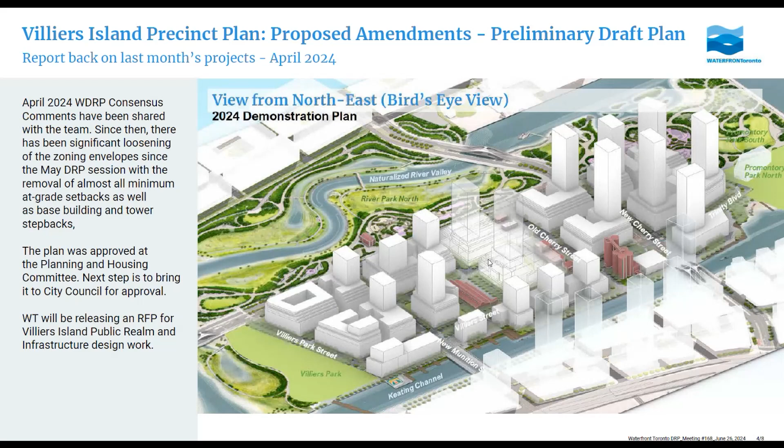Quick update since the April meeting. We have been very busy lake filling the Parliament slip just east of our new offices, to allow for Queens Quay to extend east and the Waterfront East LRT to extend east to meet with Cherry. This will also allow for the realignment of Parliament Street. These are critical infrastructure projects, not only for the Waterfront East LRT and the extension of Queens Quay, but also for the redevelopment of the Quayside precinct, as removing the existing alignment of Queens Quay and Parliament is necessary to normalize the blocks for that development.

We're now 100% complete with lake filling, and we're moving into the next phase of work to settle that lake fill. We're expecting this work to be completed by fall of this year, and then we'll start on the public realm and the creation of new streets in this area.

Two updates here on public art. From a public art perspective, the first is around the Equilibrium project. This is now under construction, and it will be officially unveiled as part of the opening of the AHT building in the West Don Lands.

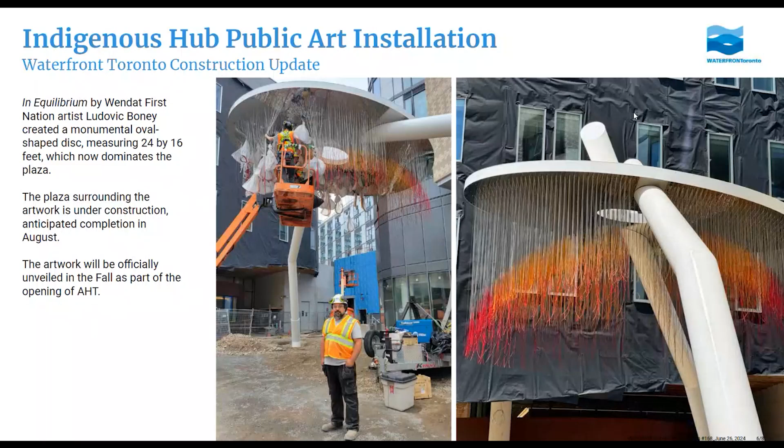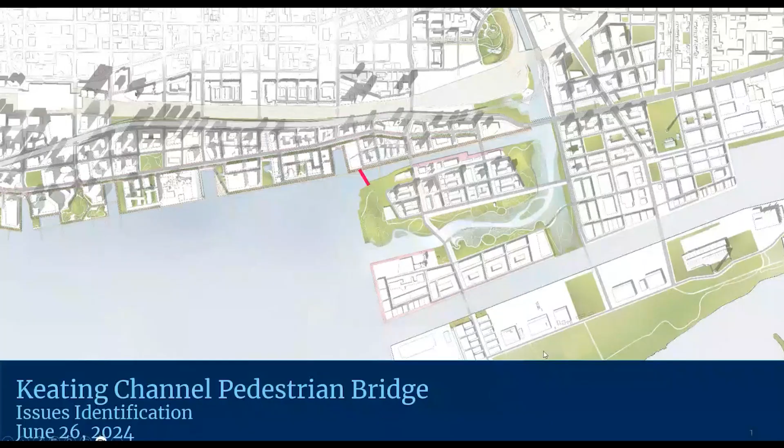If you can go to the first slide, please, Leon. Yep, just changed it, give it a second. Thank you.

So the Keating Channel Pedestrian Bridge project consists of the design and construction of a bridge crossing Keating Channel between Quayside and the new island of the Portlands. A couple high-level stats: the span of the bridge is approximately 100 meters. The minimum vertical and horizontal clearances are required. This has been under coordination with Ports Toronto for some time, known as the navigable conveyance envelope. This allows for marine vessels to continue their activities through the Keating Channel. It also protects for regulatory flood flows. This is an active transportation bridge.

The funding comes in part from the federal government's active transportation fund, and as such must be fully accessible to accommodate various modes of transportation. The scope includes structural infrastructure, surface treatments, potential integrated softscaping, lighting, furnishings, signage, and wayfinding, as well as an interim trail through the South Landing, which we'll get to in a moment.

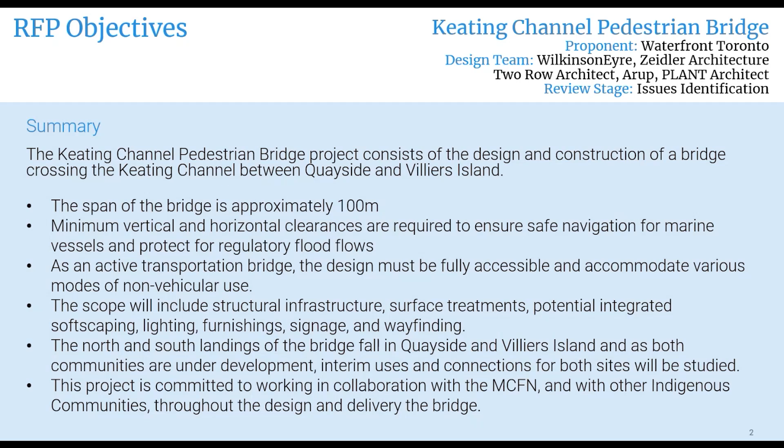The North and South Landings, which we'll also cover briefly, fall in Quayside and the future island in the Portlands. Both are being studied for interim connections, uses, and optimal integration. It's also important to note that this project is committed to working in collaboration with MCFN and other Indigenous communities throughout the entire process, which we understand to be through process and placemaking as part of this project.

The project goals were developed in partnership with our project partners at the City of Toronto, as well as MCFN and the Community Advisory Committee. We identified six key project goals in the RFQ and RFP for the design team to respond to.

We are looking for something that is beautiful, distinct, and complements the existing family of bridges. A bridge that supports active transportation by providing safe, direct, and equitable access between the city and the new island at the Portlands. Something which incorporates and integrates with landscape, biodiversity, and ecosystem resilience where possible. It includes Indigenous voice in both the process and the design, and supports Indigenous placemaking and placekeeping. It demonstrates sustainability and innovation, and last but not least, offers an inclusive, accessible, comfortable experience for all people of all ages and all abilities.

Some site context for everyone, going through a few slides to refresh everyone's memory. This map illustrates the precinct plans that make up the immediate context surrounding the future bridge. We can see how important the bridge is in providing clear, direct, and safe access from downtown and Quayside to the Portlands. We're looking at Parliament Slip, Quayside, PLFP, Villiers Island, the Keating Channel Precinct Plan, Gardiner Expressway, and Lakeshore Boulevard East reconfiguration. Lots of busy work happening here, this being kind of the elbow to connect it all.

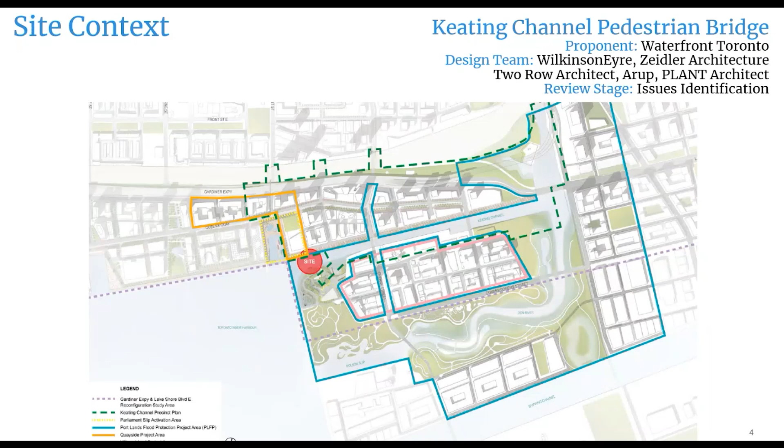Here's an existing conditions map to help orient ourselves. The red outline is the project boundary as identified in the procurement process. The location of the future bridge is at the northeast end of the Toronto Inner Harbor, at the mouth of the Keating Channel, which acts as an outlet to the Don River. Existing key context includes Queens Quay, the Martin Goodman Trail, the Water's Edge Promenade, East Bayfront, Parliament Slip lake filling, and most immediately, 333 Lakeshore Boulevard East, which is currently a parking lot. To the south, Cherry Street lake filling, Cherry Street, and the works of enabling infrastructure for PLFP.

Future site context: here we're seeing a potential future build out of these communities. We're looking at a more developed Quayside, Parliament Slip, various mixed use developments, cultural institutional centers, potential future looks of Promontory Park North, Promontory Park South, Destination Play Park, new roads and bridges, and so on.

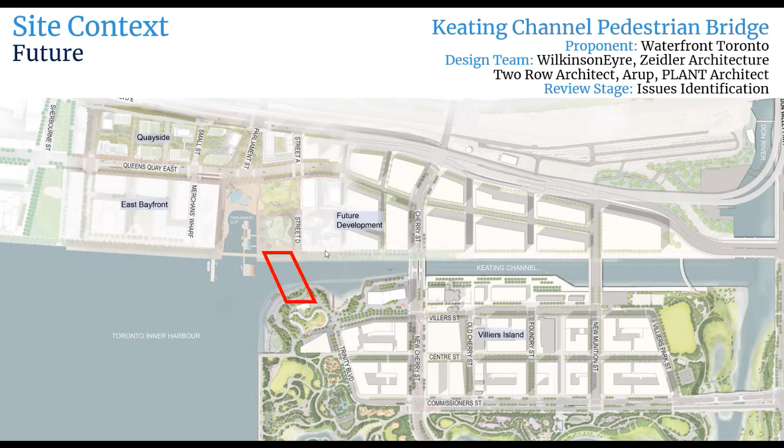We'll go through those landing sites at the north and south in a little more detail. The north landing site of the bridge will integrate immediately with the Water's Edge Promenade, coordinated with the development of the dock wall and Parliament Slip. The south landing will integrate with the future Promontory Park North, and there will be an interim trail connecting through this site down to the circulation networks of Promontory Park South. It's sort of a meanwhile solution—a temporary trail to ensure direct access.

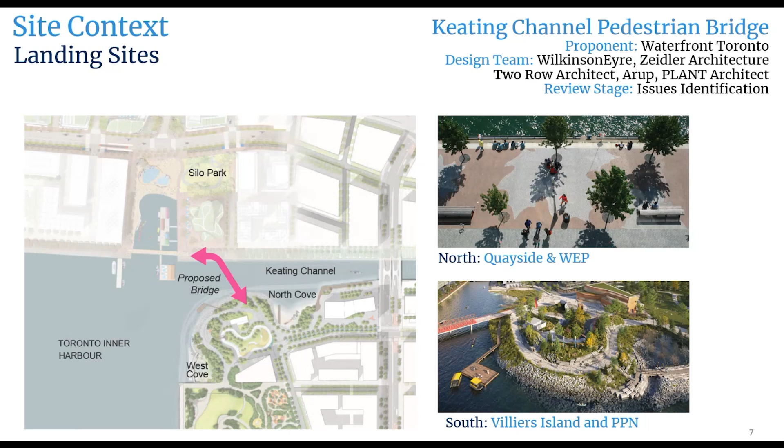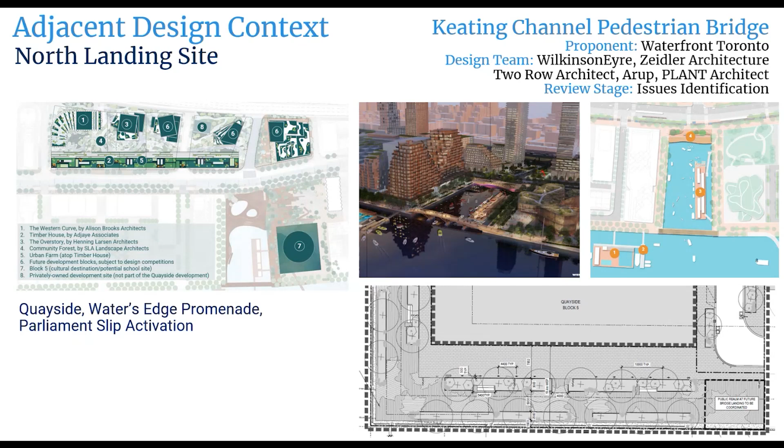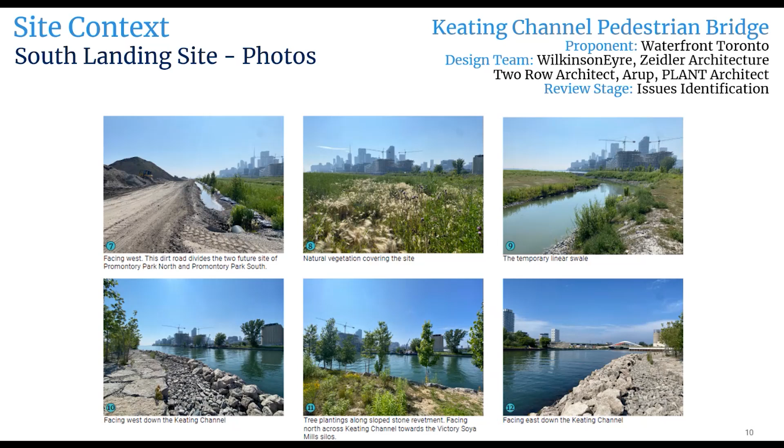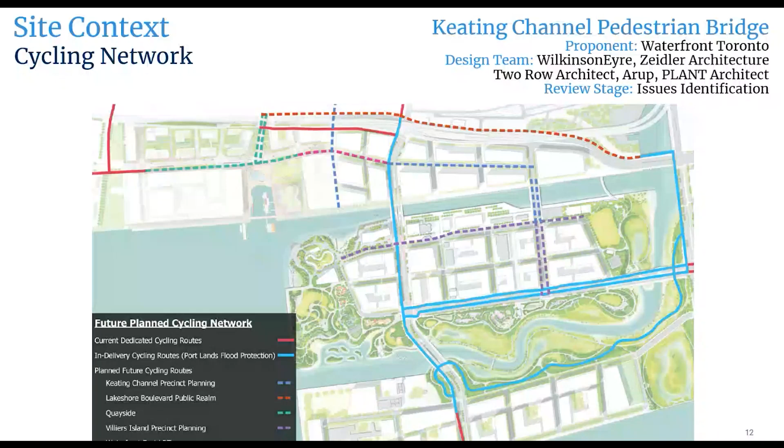So just wrapping up on the intro slides here. Next slide, please, Leon. An evaluation committee consisting of Waterfront Toronto, the City of Toronto, and the Mississaugas of the Credit First Nation reviewed the submissions and considered the input from technical advisors, our Community Advisory Committee, Indigenous communities, and the broader public.

The Equinox Bridge was selected as having achieved, in spectacular ways, all of the various project goals that we had—the six project goals—and really impressing the evaluation committee in doing so in a very innovative way. Some of these include the utilization of the S form. For those of you in the room, we have a physical model you can take a look at right here. Now, this is the competition entry, so of course the bridge has developed since then, but you can really see the spanning S shape of the bridge.

As beautiful, aesthetic, poetic and sculptural as it is, it also achieves a number of very important challenges, one being addressing different grade changes. It's also a traffic calming measure, with exceptional ways of having crossover multi-use space, and provides these beautiful pausing, resting 'noses,' as we've been referring to them, on either side of the bridge facing east and west. The bridge provides accessible places to pause, gets lower to the water, and invites people to get closer to the water—not just to move through, but also to stop and rest and enjoy the view and gather and be together.

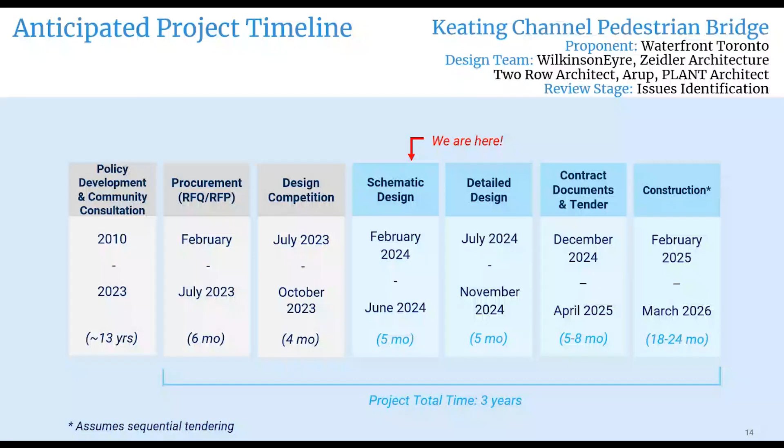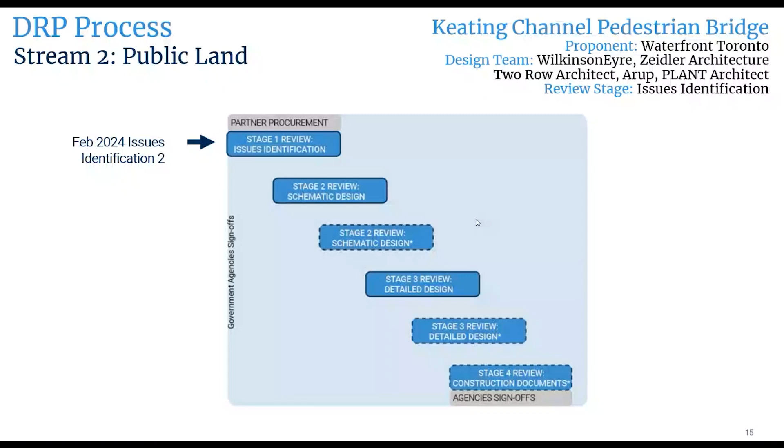And this is our last slide now. So I think the areas that we'd really like you to focus on today are our relationship with the context and the integration with those landing sites, as well as always looking for moments of design excellence, sustainability, and resilience.

So is the design well integrated with the context? Is there a greater existing and future public realm network being thought of when we're looking at those punctuation moments? How is the relationship with the Water's Edge Promenade? As you know, it's fairly well developed at this point. And how is it protecting for excellent future uses on the South Landing?

How are accessibility and active transportation challenges being addressed? How can the design continue to evolve to meet the objectives of not just design excellence, but also continuing to achieve, interrogate, and evolve through the project goals?

Is the design aligned with the objectives and character of the other existing bridges? And does it help support this unique family of bridges in this extraordinary district?

And finally, are there any other strategies to consider for reducing embodied carbon emissions for the project? Anything else that should be studied at this point in the project? So those are some of the items that we'd love your input on.

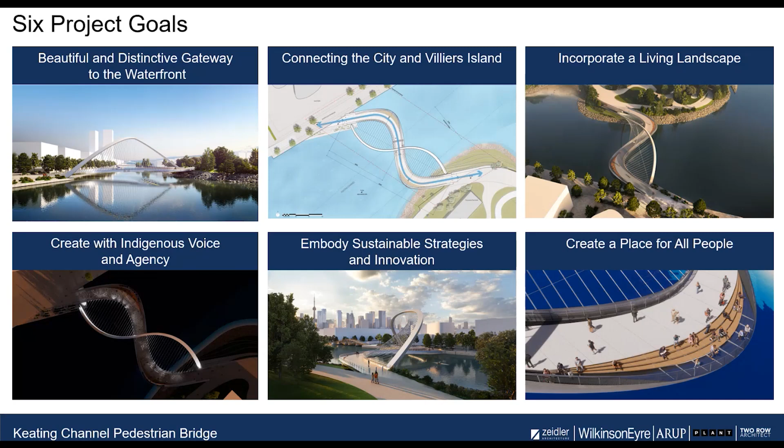And on the right there, an image taken from the North Bank. That's the quay edge, the promenade, decaying but being rebuilt. It does give technical challenges structurally, but you can see it's a completely different kind of context to that view in the distance to Villiers Island, which will become this beautifully landscaped park in due course.

Hopefully it's advancing. So a bridge, all about connectivity. The aspirations of the project are to provide a pedestrian link from the Water's Edge Promenade, the quayside, that development on the south shore of the mainland, connecting back to the city, and connecting all of that over the Keating Channel, over to Villiers Island and Promontory Park.

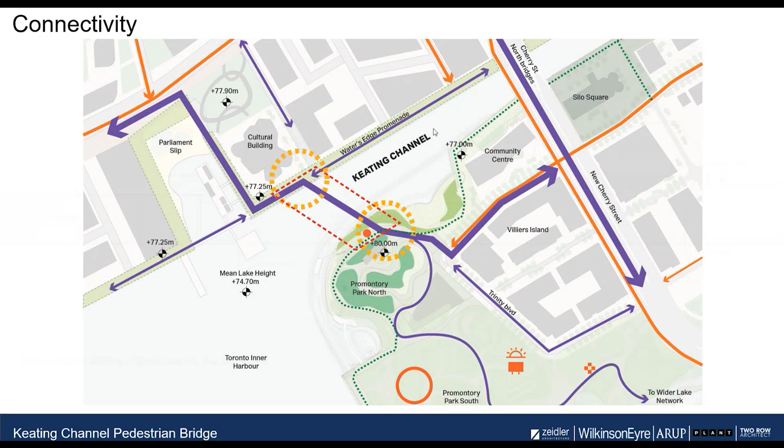You can see that on the north bank there's a current datum for the promenade edge, 77.25. And if we go across to Promontory Park at Villiers Island, there is a level change. We're at about 80 plus meters there.

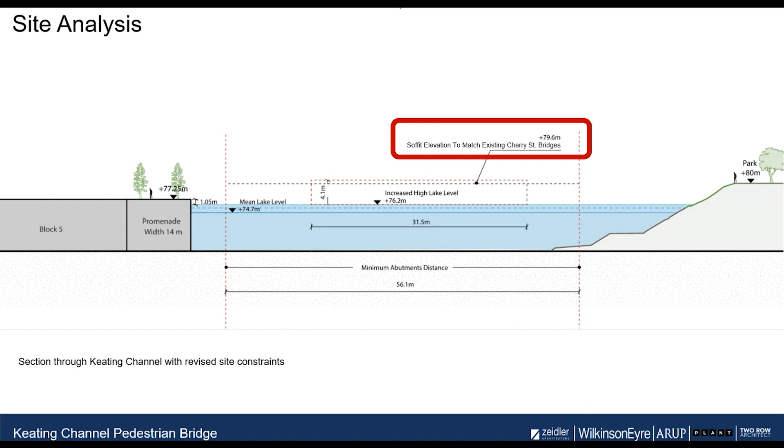So we've got about 2.5 meter level change between the two, but also the bridge has to clear a navigable envelope that's been prescribed to us by Waterfront Toronto, approximately 3 meters high and about 30 meters wide. In fact, that navigable envelope has been refined further, and we're now looking to match the soffit of the Cherry Street Bridge bridges to the east, so a slight increase in the height of that navigable box that we're working to clear.

So one of the challenges in the design of this bridge, as we saw it, was to create a barrier-free bridge sequence that had really well-resolved abutments both to the north, to the quayside, but also to Villiers Park to the south.

You could imagine spanning the Keating Channel with just a very simple arch form, and looking to ramp up the bridge from the lower levels at the quayside, ramp it up and over the navigable envelope, and arrive at the upper level in Villiers Park.

That sounds quite straightforward, but if we're to put a ramp in that complies with disabled requirements, 5% pitch, and other user groups like pushchairs, then we're limited to that 5% pitch, and it's very difficult to achieve a ramp solution that clears the channel as a straight line. Given that ramping requirement, you end up with a bridge that's very, very long.

So one of the first things we looked at was to see whether setting out a bridge diagonally across that buildable box would give us additional length to drive the bridge across the channel. In reality, that creates a very large amount of embedment of the bridge into the promenade on the quayside, which creates a really strong physical barrier in the east-west direction, as you can see from this diagram. So we realized straight away that doing a straight line crossing was going to be incredibly unsuccessful.

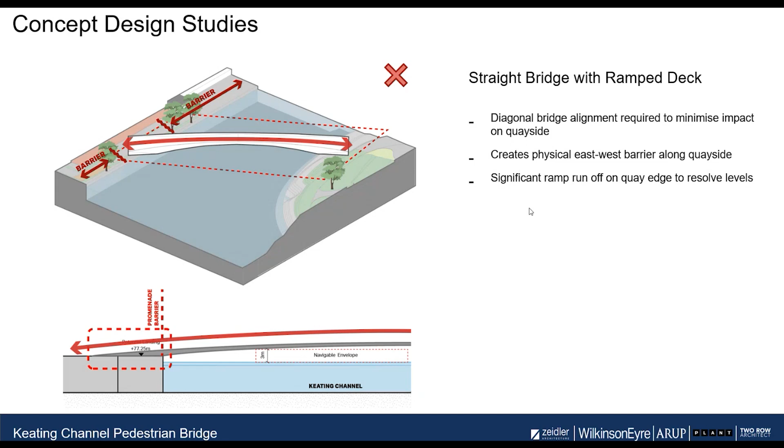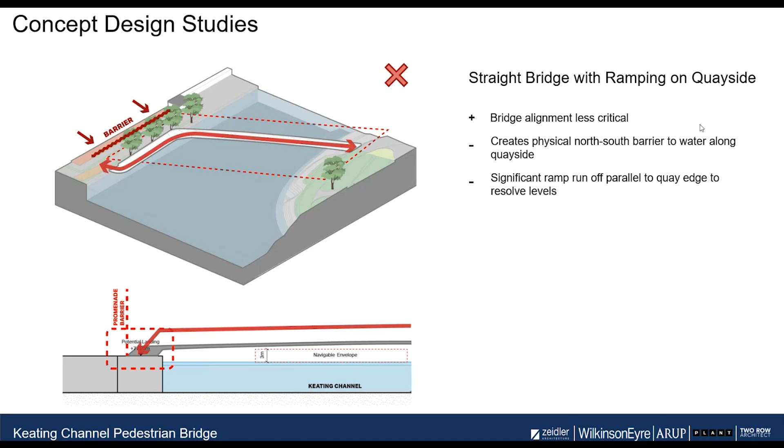An alternative strategy might be to say, well, we'd put the bridge where we would like it to be, a straight line potentially from A to B. When we ramp the bridge as much as we can, we introduce a sort of large tail, like a hockey stick, that allows us to ramp down to the quayside edge. Again, what that does is create a physical barrier running in the north-south direction, which really severs the connectivity from the development to the north to the water's edge itself. So again, not ideal in terms of an architectural solution.

So one way you could think about it is to add extra length to the ramp by curving it. This was the first strategy we looked at in terms of a curving concept. The curve here looks to pick up the pedestrians in the most logical way to the most western point of the buildable box, and then curve the bridge deck in an easterly direction and bring it back onto the high point at Villiers Island. That does give you the right amount of ramp length and the 5% limiting ramp pitch. But as you can see, it does create a bridge with a very monodirectional outlook, looking eastwards along the Keating Channel, and really turns its back onto the lake to the west. It is a structurally efficient solution, and it could be cost effective.

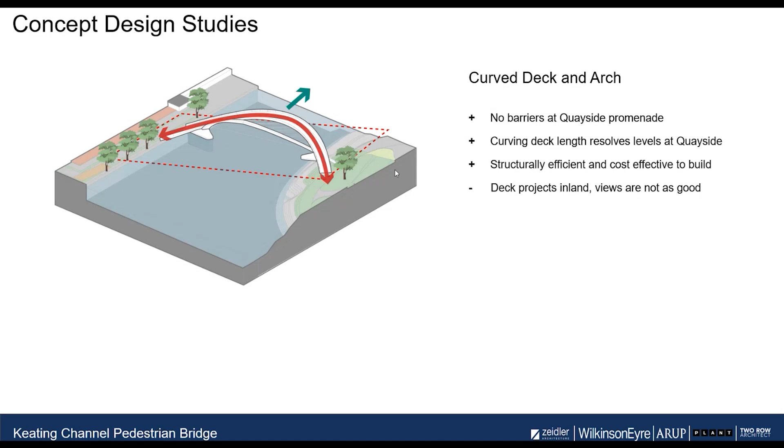But we still felt that there was potentially a better solution out there. So we looked at an S-deck, and in this case, we looked to see whether that S-deck could be supported by a series of masts, which could be quite playful and sculptural, and clearly has a nautical theme to it. The S-deck is very successful.

What that does is it gives us additional deck length to allow the ramping and the levels to be mitigated, the level change to be mitigated between the quayside and the park. And it also creates, as Anna mentioned, two noses, effectively the corners of the S shapes themselves. So a series of a nose that faces westwards to the lake and addresses the lake, and eastwards along the Keating Channel itself. So very positive as a move.

It also provides natural traffic calming for cyclists to mediate around that S-shaped deck. And as I say, it gives this equal importance to the viewing aspects from the bridge.

However, introducing masts and piling into the river or into the channel itself creates complexity. It creates costs. It creates potential obstructions to river traffic, which all need to be dealt with. And it doesn't really tie into the family of bridges, importantly, that the Cherry Street bridges have so far defined.

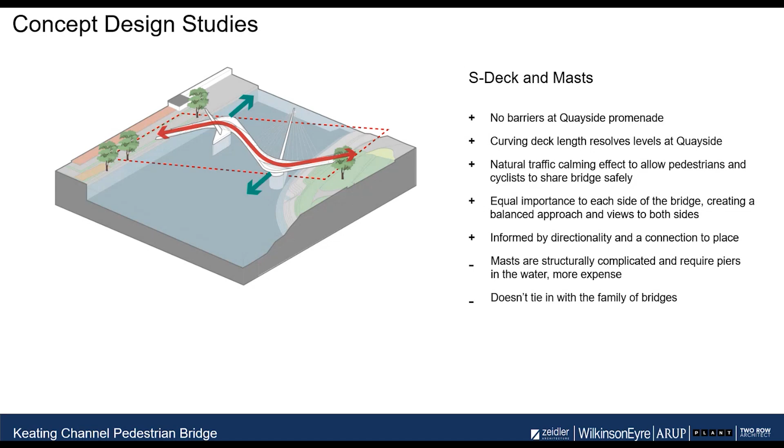With its masted structure, we moved on to our sort of final solution, which was to retain the S-shaped deck, which for all the positive attributes that came with it, but to support the deck, which is nearly about 95 meter span, with an arch-shaped structure, which ties well into the family of bridges that have been set up by the Cherry Street bridges.

And it has all the positive attributes of the deck alignment that I've talked you through: the creation of noses on the corners, the traffic calming, the sufficient deck length to mediate between the lower quayside, the promenade to the north, and the raised park to the south.

The arch is structurally efficient and requires minimal steel. Again, a key client benchmark goals to really try and make an efficient and environmentally efficient, as well as efficient cost-wise piece of infrastructure.

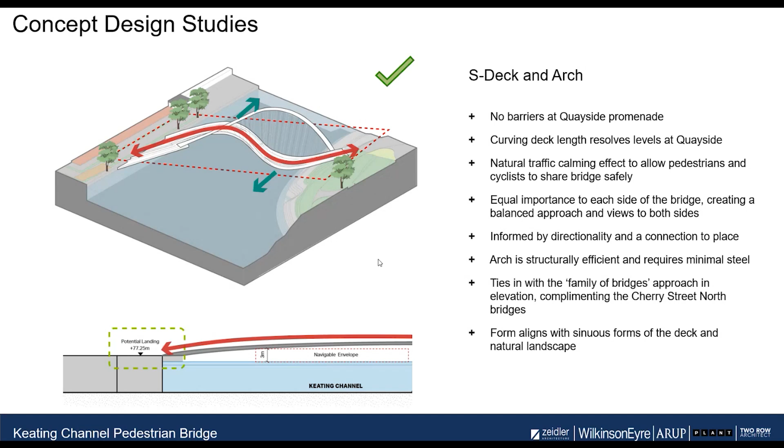So we took that design forward as part of our concept design studies into design development, and we really liked and celebrated the notion that this could be a sculptural bridge.

The arch form itself is an anti-funicular arch. We think this might be a world first, designing this with Arup and using their extensive knowledge. They're not aware of a bridge of this nature, so potentially very much a landmark status in terms of its design.

The sculptural nature of the arch and the cabling that are raised from it, again working with the idea of, or inspired by sculpture, the work of Naum Gabo, particularly the idea that cables, fine thread, can define space and geometry and create really interesting three-dimensional spaces, was something that we were very interested in, and was part of this sort of playful sculptural aspirational design.

So looking at the bridge from slightly raised elevation here from the south, you can see the S shape of the deck integrating nicely with the northern quay, so the promenade, and equally in a sinuous way integrating into that more fluid landscaped park of Villiers Island.

So turning to the plan, you can see that the S-shaped form allows a bridge to sit within the prescribed buildable boundaries of the site, the client's defined site.

The northern abutment landing with the potential for an interesting new space that might address not only the Water's Edge Promenade, but also aspirations for an interesting building on the corner of this quayside development.

And equally to the southern abutment, forming part of this fluid language of landscape that is being set up as part of Promontory Park. You can see from the plan the creation of these noses on the corners of the S shape.

With integrated seating facing down into the lake, but equally down Keating Channel itself, and the arch over the top with the cable array connecting to the deck below.

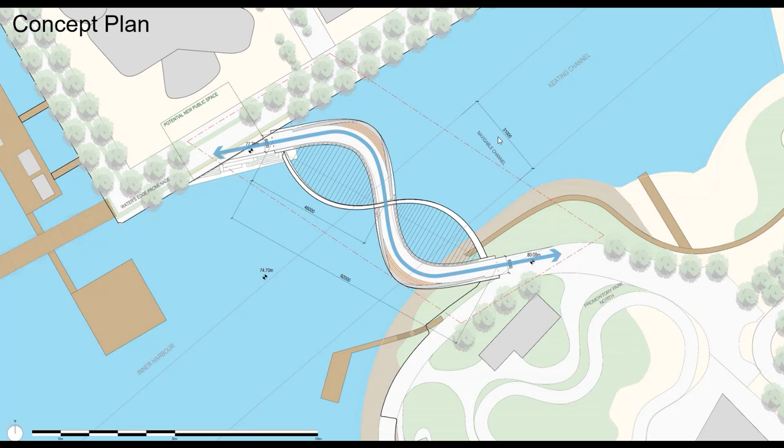So a journey that isn't about a point-to-point relationship, a celebratory journey across the Keating Channel, so more than just a piece of infrastructure. A bridge that we see here is very sculptural in its nature, playful. It's about a celebration of that journey across from point A to point B, and creating places to stop, dwell, and get close to nature, admire nature, and really visual amenity for all.

As part of the bridge design and the S-shaped design, on one side we have a perforate handrail design that allows for maximum visibility from the pedestrians to the water and the landscape beyond. On the opposite side of the deck, we have a slightly raised screen, which is perforated and provides wind protection. It's slightly taller, and having done this on bridges before, it's very successful.

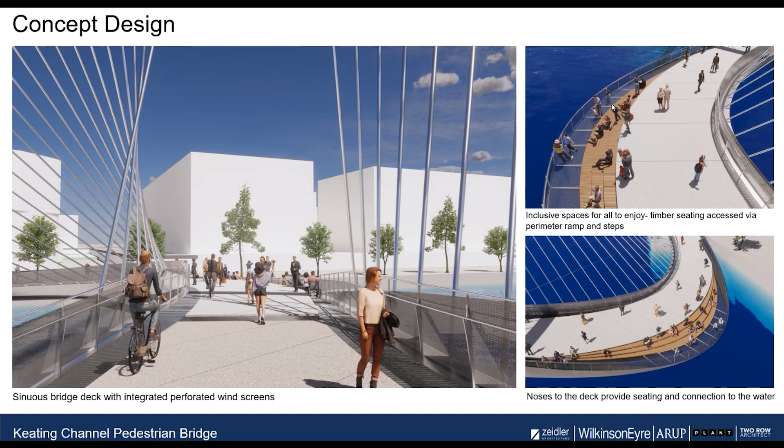As well as you can see the integration of timber into that seating zone as really, we think, an appropriate material. That has advanced a bit further from those competition visuals. I can talk to you about that and update you on that in a second.

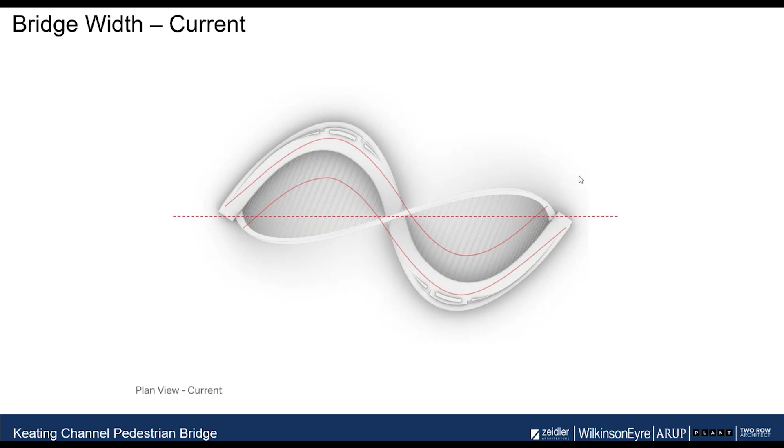And also we've taken the opportunity with this realignment to help refocus the noses, the seating on the corners of the S-shaped deck, to really maximize the view out into the landscape.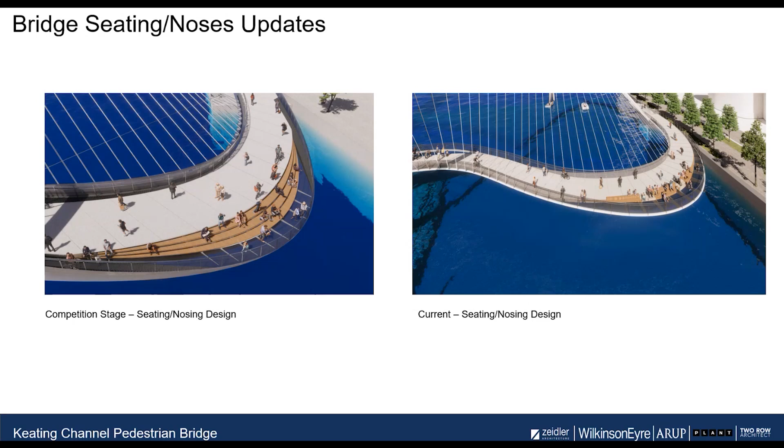So on the left, where we were at the competition stage with the seating to the noses and the perforate zone to the water's edge above or below. On the right there, where we currently are, there's been a rationalization of that seating, a creation of much more equitable access to both the seating and the lower zone, the perforate zone, for all user groups.

And then the seating that sits to the back of it, now in a very similar way to how we design stadiums and big public event type buildings, integration of dedicated zones for wheelchair users to sit next to friends and other people as integrated as part of that seating zone.

This sort of jumbo seating provides both seating potential and a barrier from the main pedestrian deck and cycle route behind, as you can see. This has all got ongoing work and is being constantly developed and tuned.

In terms of materiality, selection and sustainability, the two go hand in hand. We strive to select materials that are robust and have long lifespans - that's part of the sustainability of this project. So steel and stainless steel for structure, for handrails, and part of the balustrading for wind. Timber, where we want to integrate seating, is obviously much more comfortable to sit on than steel plate. And materials like wedge wire, which provide very good visibility through them but also are perfectly good heel guard material, so there are no issues with trapping people's different types of shoes.

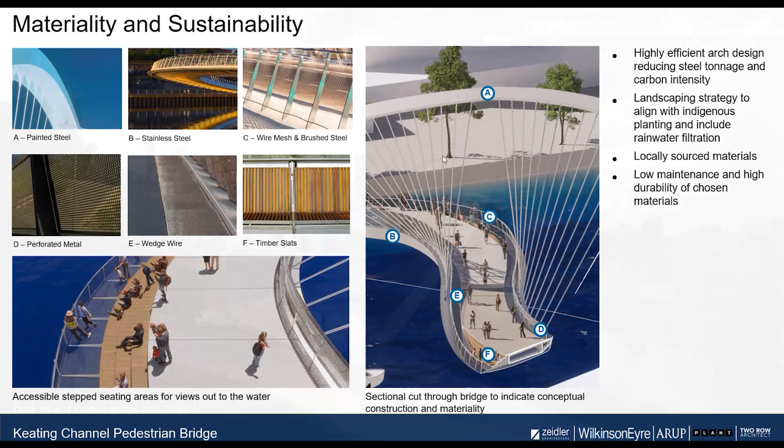Here's another view of the bridge, showing off the sculptural elements of the bridge, the way the cables define space and gateways both to the city and to the island, as I've already mentioned - this distinctive, beautiful landmark bridge that we're aiming to provide.

The indigenous conversation has been present throughout. We've been working with Two Row from the competition stage, and we've had workshops locally with indigenous leaders. Really, from the very beginning, the bridge has been integrated into that story - the idea that the bridge connects to the cardinal directions and to the sky, the water and the land.

As you know, the bridge is called the Equinox Bridge, which really shows its connection - I'll come on to that in a second - but it shows how we're looking to connect the bridge to the movement of the sun. So certain moments are set up that address the bridge, allowing it to address the summer and winter solstice, as well as the equinox.

We talked about the inclusion of native planting at the abutments, connecting to the water itself, and the sacredness of that to Indigenous peoples - places of seating, gathering spaces, connection to one another, and places to share stories. A lot of this is driven by conversations with the elders and the MCFN.

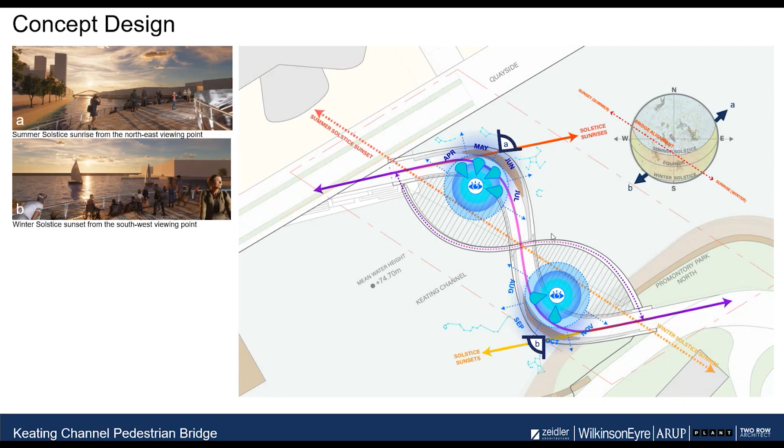As we come to the other nose, point B, this equally gives a really good view of the winter solstice sunset. So two interesting connections there to the solstice.

From point C, the bridge itself - the center line of the bridge runs through an alignment that aligns the bridge with the summer solstice at sunset, as you can see in that image. The idea is that the sun at a certain point is actually captured between the cable array emanating from the arch over the top of the deck. That's point C, looking northwards.

Equally, point D is for the winter equinox, looking in reverse - again, there's an alignment running down through the bridge.

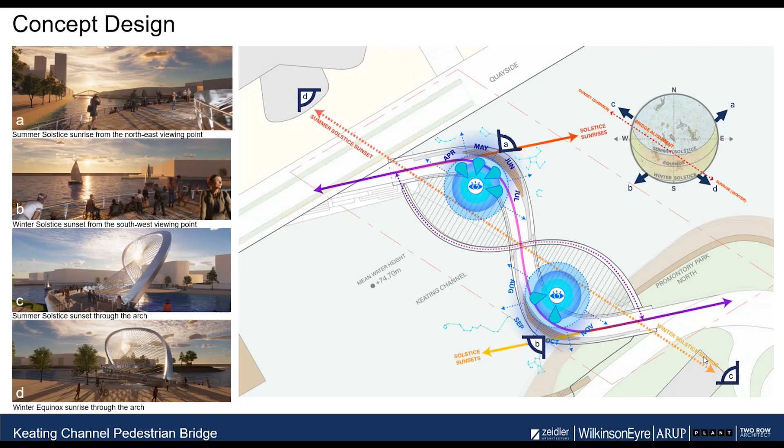So there's a macro set out of the bridge to do with the movement of the sun throughout the year, and then playing with the potential to perforate the windscreen - the slightly taller element of the deck that provides wind shelter to pedestrian users - with the idea that we might be able to perforate it and shine light through to create shadows of the constellations onto the deck. There's also the notion of the underside of the deck reflecting the sparkle of the water, almost giving the impression of the bridge having some life to it.

So that's just a conceptual view of the bridge from above, with the various constellations being shone onto the deck itself.

These could be lit by projectors, if not through the balustrades themselves, but I like the idea of the balustrade by day having these interesting constellations engraved into them, and then at night a different use for them as they're used to shine light through. So it's quite an interesting day-night scenario.

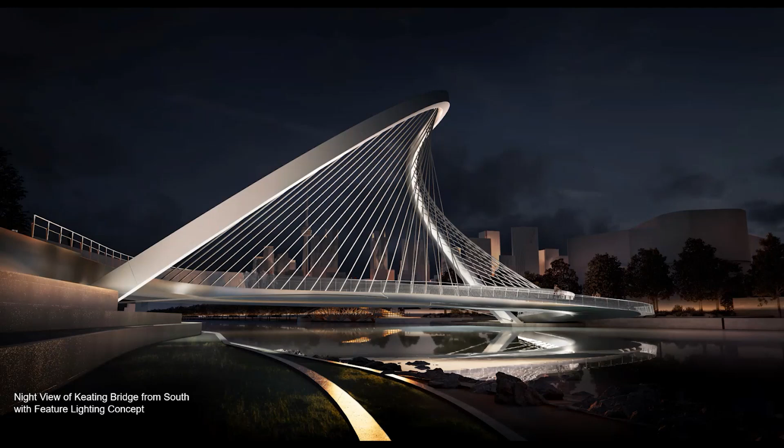Equally, from the beginning, in common with all the bridges we do, the bridge has to be distinctive at night, or at least we think it has great potential to be very distinctively lit, creating this landmark structure connecting Villiers and the city. So lighting of the arch and the cable array will be important, as well as a reading of this kind of sinuous deck.

alignment, how the bridge connects into the abutments. As mentioned, this is of real interest to us as a team. The north connection, at the competition stage, certainly formed part of a bigger story where the landscape stepped down to the water in a series of planters and places to sit, as well as ramping, with a flush alignment between the deck and the water's edge.

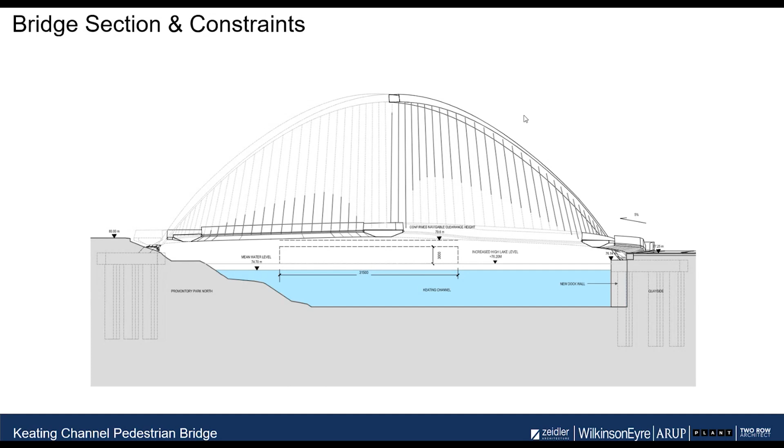That's just a section to show the bridge, and I'll come back to the south abutment in a second. That's just to show that the bridge meets the prescribed clearances and aligns with the Cherry Street soffit to the east, and you can see how the bridge is supported at those abutment points.

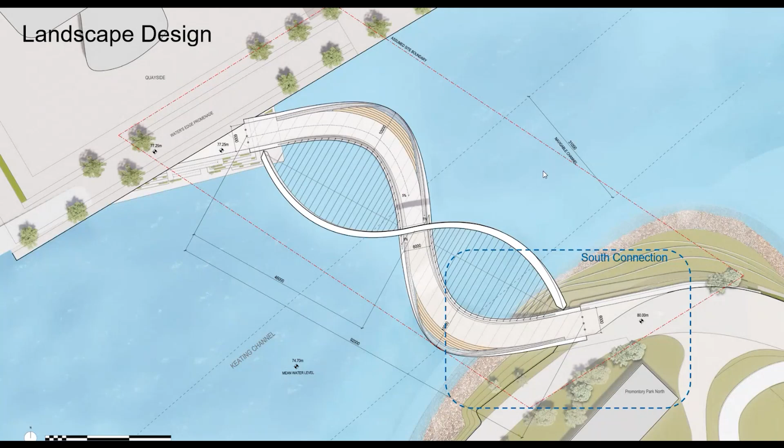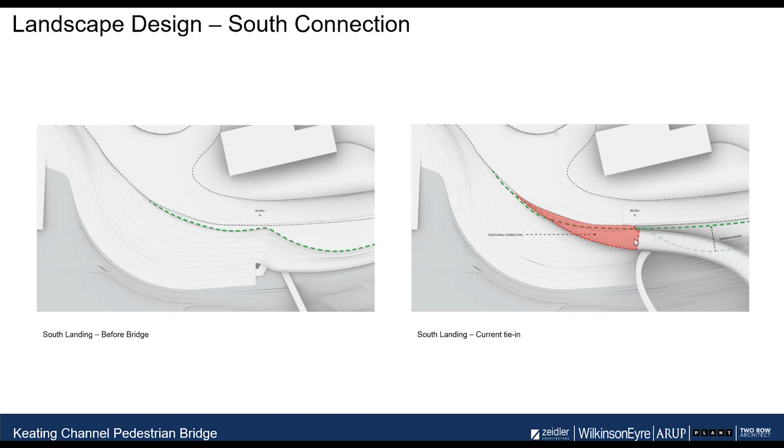And then I mentioned the south connection, really trying to get the bridge to integrate into the landscape in a very fluid way. Obviously, a flush abutment is what we're achieving, or trying to achieve and achieving. So this was the south landing before the bridge, as it is currently, and on the right there, our proposal to really tie the bridge into an adjustment to that landscaping, part of the fluid geometry of our bridge and the landscape design for this part of the island.

Again, a fluid connection at the same level, as you can see in that image on the left, where the transition between the landscape to Villiers is completely flush with the bridge deck itself. On the right there, just to develop further, that's really where we are at the moment - refinement of the competition view you can see on the left. So the right is what we think is a very successful abutment detail.

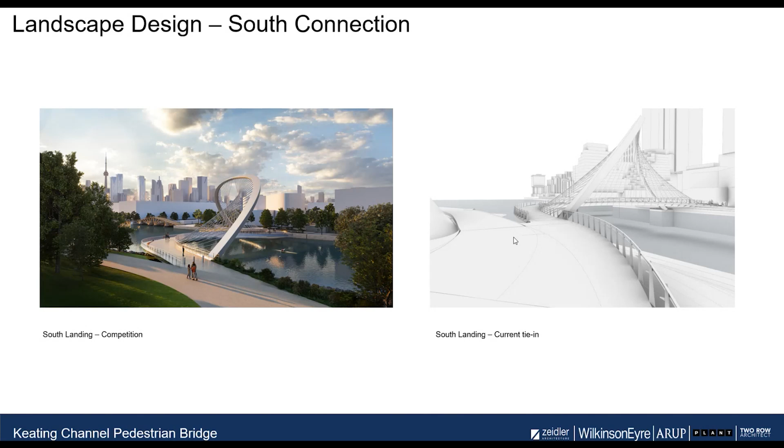And you've seen that view before. Really, the last few images here. So, view from the west looking eastwards: the S-shaped deck, the connection between Quayside and Villiers Island to the right, and then this sinuous deck, this anti-funicular arch that forms over the top, creating a strong relationship with the Cherry Street bridges in the distance. And that was the last slide.

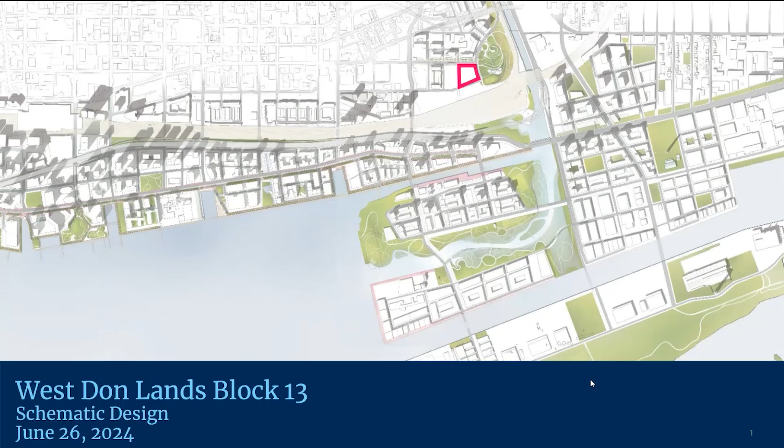To give everyone some background on this site, Block 13 was part of the 2011 Pan Am Athletes Village RFP that was completed with IO. Dream and Kilmer were the successful winners of that bid, and it included Block 13 along with Blocks 12 and 16. Block 13 is one of the last remaining blocks to be developed and is located directly west of the Corktown Common Park.

Waterfront Toronto and Dream and Kilmer entered into a development agreement in 2011, and as a condition of that DA, they're obligated to build to LEED Gold. It's currently TGS version 3 right now. Dream and Kilmer will share some of the design specifics in their presentation, but at a high level, some of the GFA impacts include an increase of the residential square footage from 602,000 to 688,000, increasing the number of units by 200 and bringing the total to just over 1,000. The commercial GFA has also increased from 8,200 to now 10,660. Car parking ratios have decreased from 0.24 to 0.16, bringing the number of spots down from 214 to 169. And total bike parking on site is 1,084.

In March of 2022, Dream and Kilmer completed their pre-application consultation, and later in April came here for their DRP issues ID, and also submitted their first rezoning and SPA submission. They'll share more about their future milestones and timelines in their presentation.

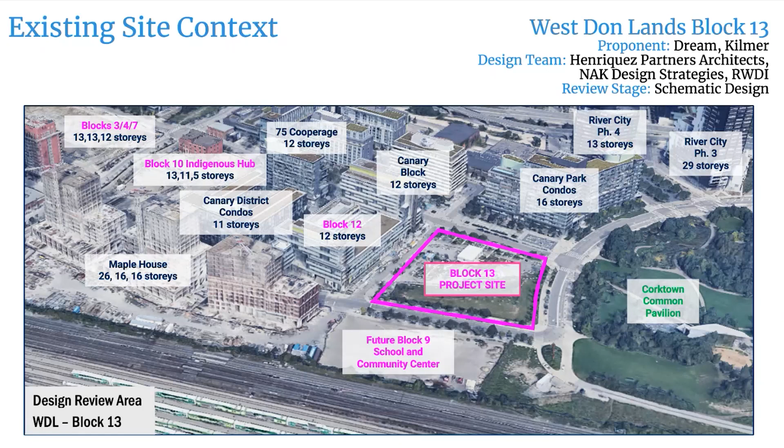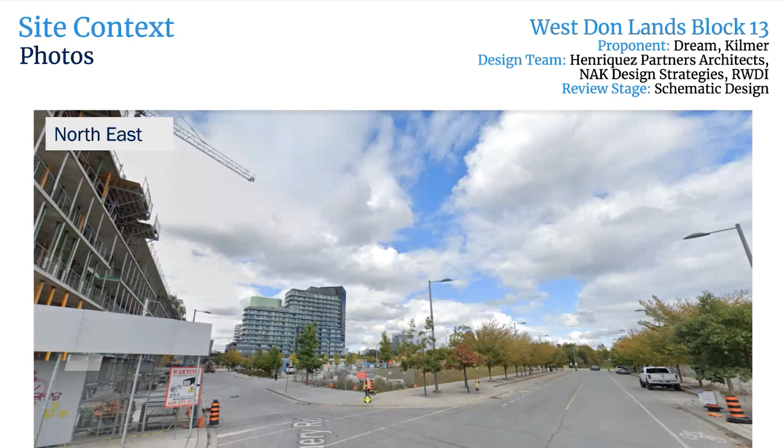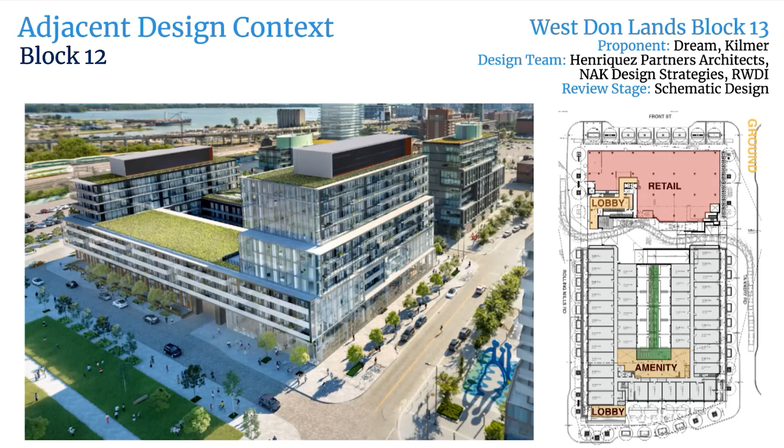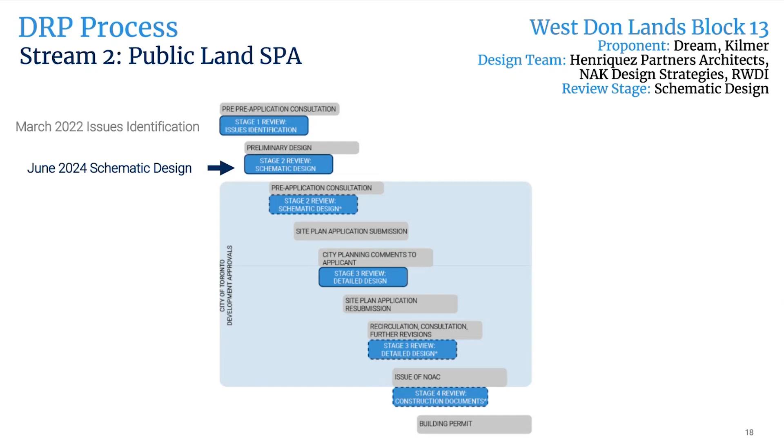I'll now pass it on to Leon to speak more of the DRP process. Thanks, Derek. So this project's application was a stage 1 review, so no vote was taken. Today they've returned for schematic design review. We will take a vote and we will see this project one more time later at detailed design. Next slide, please.

Just to quickly refresh, this is the design that was shown at that stage. You'll note in the presentation, of course, the massing has changed, the design has changed. I'll quickly recap the consensus comments from us. I'm just highlighting the key points: generally, consider the memory of the site, the inspiration for the design, the indigenous community, and shadow studies throughout the day at schematic design. Show the existing context and buildings and drawings, including adjacent buildings in the section and elevation drawings.

I'm breaking up, I'm sorry. I'll try to just get through this. If you can't hear me, then I can move ahead. You can refer to these slides.

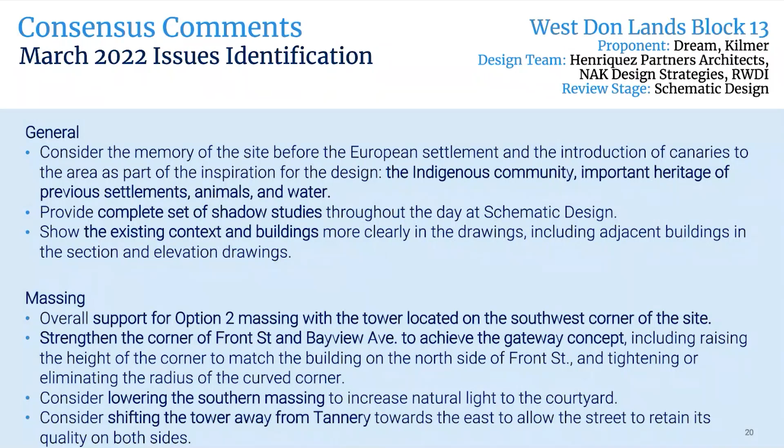How is the audio? It's okay now, but you were breaking up. So yeah, we can see it. Just keep going. Okay, why don't we just move forward, Derek, to the next slide.

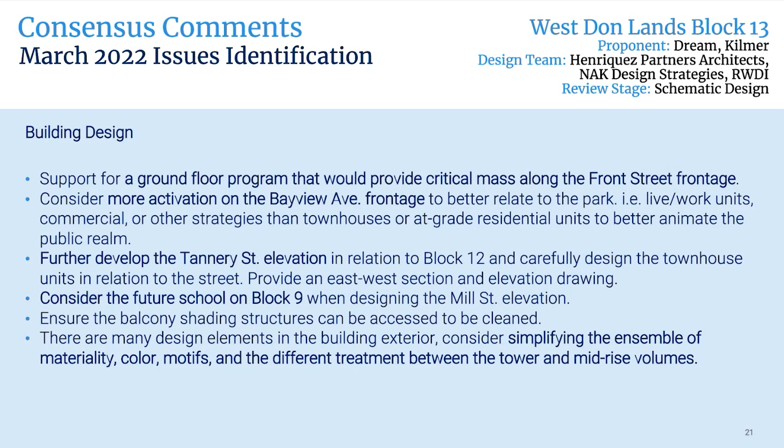In terms of building design, there was support for a ground floor program that would provide critical mass along Front Street. Consider more activation along the Bayview Avenue frontage, further develop the Tannery Street elevation, and also consider how this building will relate to the future school on Block 9, on the south side of Mill Street. Also on the building exterior, consider simplifying the ensemble of materiality, colors, motifs, and the different treatment between the tower and mid-rise volumes.

On landscape, retain the existing street trees instead of replanting as much as possible. Ensure the landscaping for the at-grade units is well designed, serving as a threshold between public and private. Maximize sunlight into the courtyard. On sustainability, consider the use of thermally broken balconies, and maximize all efforts to reduce embodied carbon.

Finally, we want to highlight a few areas for the panel to consider today. Does the revised massing respond to panel comments and relate well with the built form and public realm on all different sides, all the key frontages? Is there support for the revised tower location, the revised facade design concept and cladding strategy? Also, is there support on ground floor programs along the key frontages? Does the panel support the streetscape and landscape design concepts being presented today? And finally, do the proposed sustainability strategies meet our objectives? Are there other strategies the team can consider at this point of the design? With that, I will pass it over to the design team.

Thank you. I believe Gregory, are you going to kick it off? Can everyone hear me? Is it clear? Okay, so Stephen, you want to say a few words or should I just jump in? Please jump in. Okay, I'm going to try and share my screen, everyone. I'm old and I get bumps with technology, so I'll do my best. Have Nicolette, in case I can share. Can everyone see my screen? Yes. Mazel tov, okay here we go. So here, I'm going to go very quickly because I know everyone had this presentation ahead of time. Please stop me at any time if you have questions, and at the very end we're happy to come back and answer whatever you want. We have a full contingent of people here to answer your questions. I'll do a quick presentation, then we'll have a landscape presentation, then we're going to do some shadows, then from Bousfield, then the landscape, and then at the very end will be sustainability.

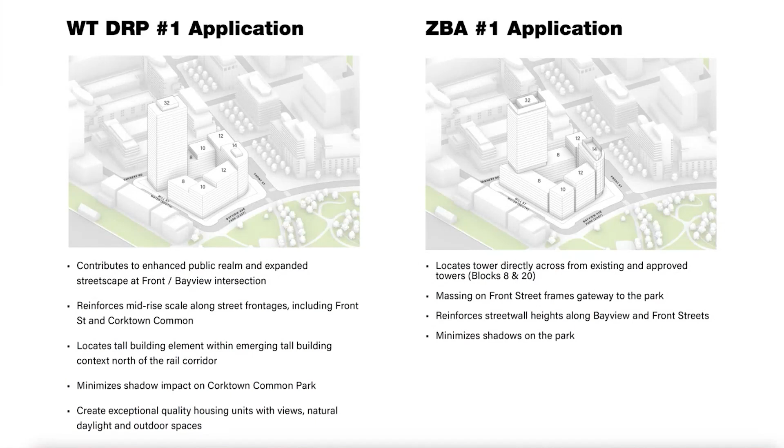The first DRP, which was presented by planning just now, was very different than what you'll see today. The application in terms of ZBA number 1 was also very different. What we heard was long, and the majority of comments stemmed around two things. One, about getting the building to fit into the urban design context and not be distinct and unique, but really be contextual—a real desire for the building to be contextual and part of the Canary District, fitting into its neighboring buildings with adjacencies matching the scale of the buildings across the street. The other thing we heard was to tone it down a bit and create a simpler architectural expression, more in keeping with the neighborhood itself. So those are what we've been working really hard to do today.

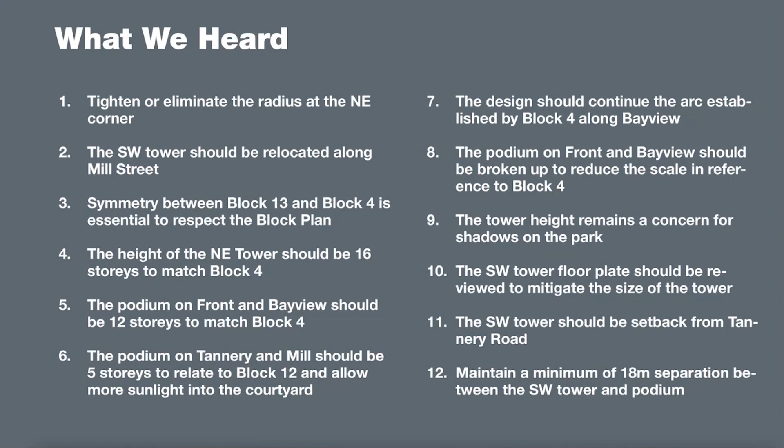And this is the first step in the rezoning. Obviously, much more development will be done as we move forward into the SPA.

One of the very first ones has to do with Bayview and the relationship with Block 4 and how the building faces the park. The big concern was trying to find something which embraced the park and made a street wall consistent with Block 4, but also allowed it to feel like a contained facade in relationship to the public space.

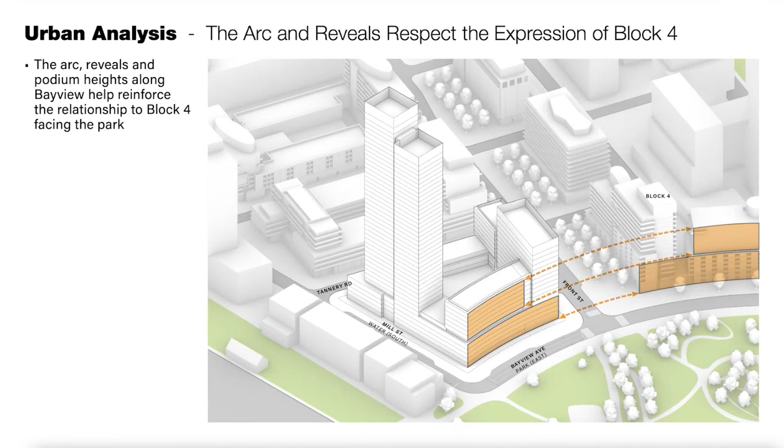So we've matched Block 4, both in scale and even the curving of the facade, which was a very specific request. The other element had to do with what I'll call the gate posts at the end of Front Street as it meets the park.

The Kuwabara Payne McKenna Blumberg building has a vertical element, I think around 16 stories, and ours matches 16 stories across. The idea is to really create this entry gateway into the park.

The other relationship had to do with both Mill Street and Tannery Street, having a 6-story podium which related to the future school, but also across to the more intimate scale on Tannery with townhouses facing other townhouses, which makes a lot of sense.

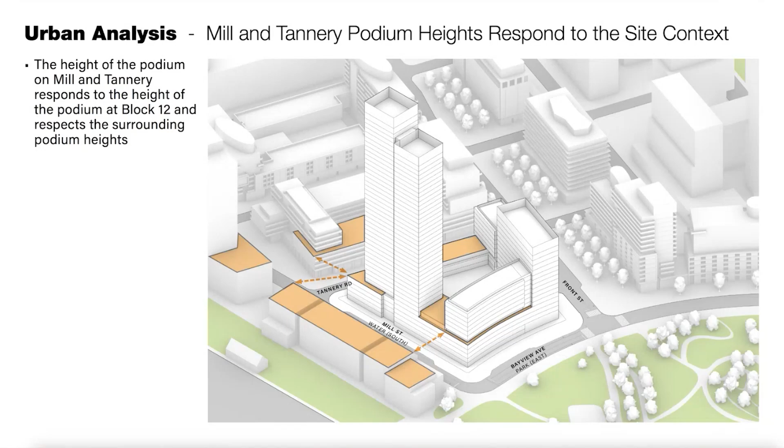So here you see a revised massing with the tower now running parallel along Mill Street, broken down into 2 masses in order to create a more intimate, smaller scale for the tower.

We have a 12-story street wall on Bayview, which frames Block 4 as we discussed, 16 stories at the corner of Front Street, 6 stories on Mill Street and Tannery, and a 12-story element which transitions on Front Street as you come down towards the park.

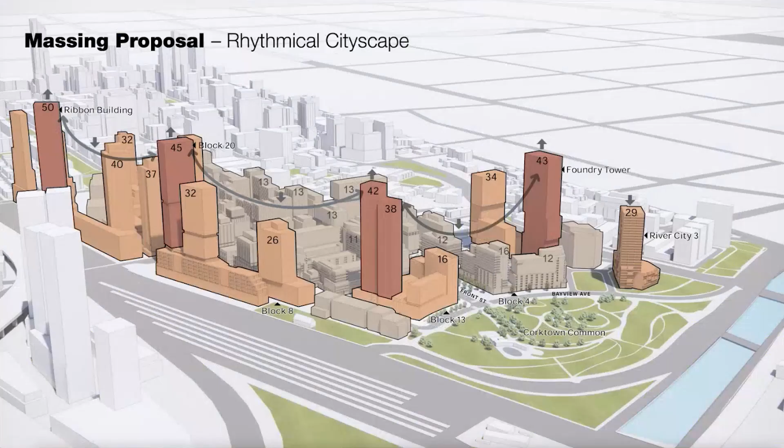So what you see here is the new story in terms of the larger picture of the neighborhood. You can see how our podium building now fits into the podium building in Block 4, and our larger tower is now consistent with Block 20 and the Foundry Tower, which frame it on either side. So we're in the middle.

What we've tried to do is break the scale of the building down vertically into 2 elements and shift them slightly so that the floor plate doesn't look so large and somehow ties into the tectonic of the story as a whole.

In terms of design development, we had a very intricate story about canopies, wings, colors and textures, which was felt to be too busy for this neighborhood. So we've broken it down into 2 very distinct elements, which we'll call, for the purposes of this presentation, Tectonic A and Tectonic B.

Tectonic A is now a darker charcoal color brick for the moment, and it's really about the buildings that hit the ground. They're about the street walls and the elements that emerge from the ground to create a distinct parti, which frames other elements we're going to call Tectonic B, which sit on top of the podium.

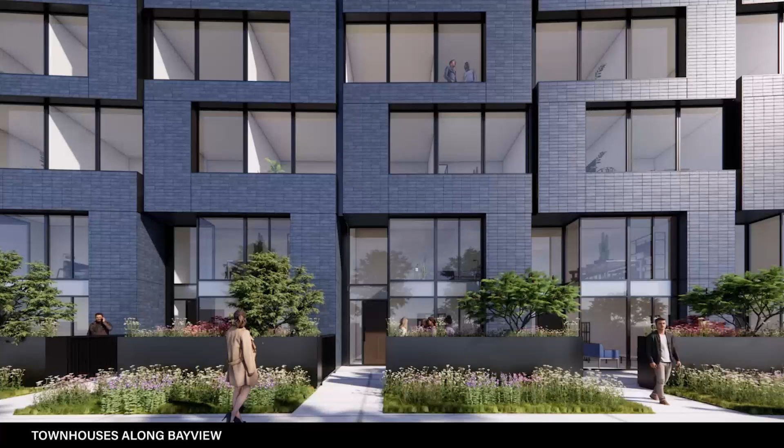In terms of townhouse expressions along Bayview and other places, we have a very simple, elegant, modernist townhouse expression, each with their own little front yards, gardens and planters, which frame an outdoor space, a little tree, and a door which frames and comes in.

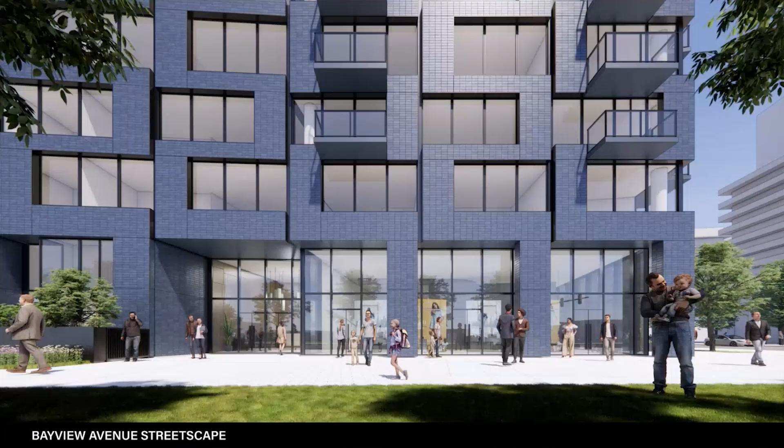As you come around Bayview towards Front Street, it transitions into retail and entrances for the residential buildings, and the same tectonic continues.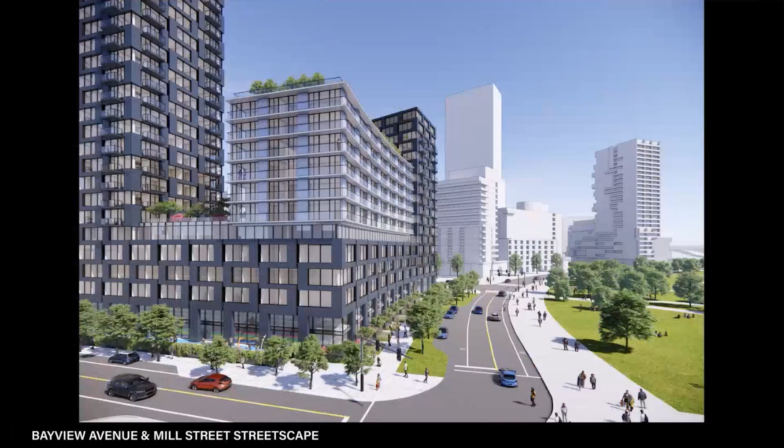So you can see it becoming retail along Front Street, and the idea is restaurants and other things will spill out onto the public realm there, with the ability for a whole bunch of different retailers, smaller scale than we originally envisioned, so you can have a bunch of different restaurants rather than one larger restaurant. Each will have its own signage and its own little areas for spilling out for seating. And if you look now facing the park, you can see the street wall building, the 12 stories.

That transitions up to the 16 stories down at the corner there and how it faces the park. There's an opportunity you can see on the left in the corner for a possible daycare, which could be along Mill Street, which I'll talk about more as we go. And as you come down Tannery and Mill Street and look towards Tannery - sorry, getting them mixed up, the streets, I'm all dyslexic.

The townhouses continue and turn around the corner along Tannery, and they face the other townhouses across the way with Block 12. I've got to get the numbers straight, Block 12.

Here you can see the parti very clearly of the two different tectonics. You have the darker brick tectonic, which wraps around and goes up and becomes one element in the tower, and the lighter brick tectonic, which is very minimalist, which sits on top of it and beside it.

Here's facing the park. You can see what we hope you think is a very elegant, simple parti of one L-shaped piece, which sort of defines the entrance to the park and also the park podium, and then the more continuous horizontal bands of balconies above.

Here's a view down Front Street, so you can see very clearly how the 12-story podium in back of our 16-story corner starts to transition to the other 12-story buildings along the way. And our tower gets broken away and shifted into two elements in the distance, hoping that it reads very thin and elegant. Here's a little higher up, if you're a bird.

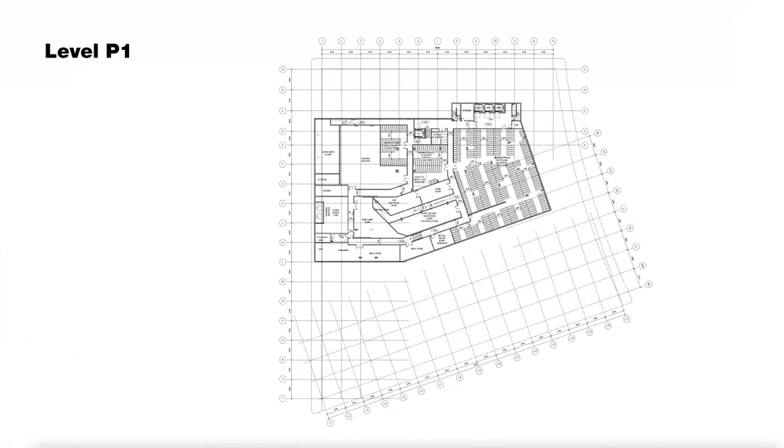At P1, below grade, we have all of our bicycle stalls, and as we come up to grade, you can see the ground level plan with Tannery Road here with the townhouses in Block 12. Mill Street has the potential to have a daycare.

The purple are townhouses facing Bayview and Tannery, and we have CRUs, smaller CRUs now, which march along Front Street and face onto Bayview on the corner. And all of the parking is buried internally, with the entrance to the parkade mirroring the entrance across the way along Tannery Street.

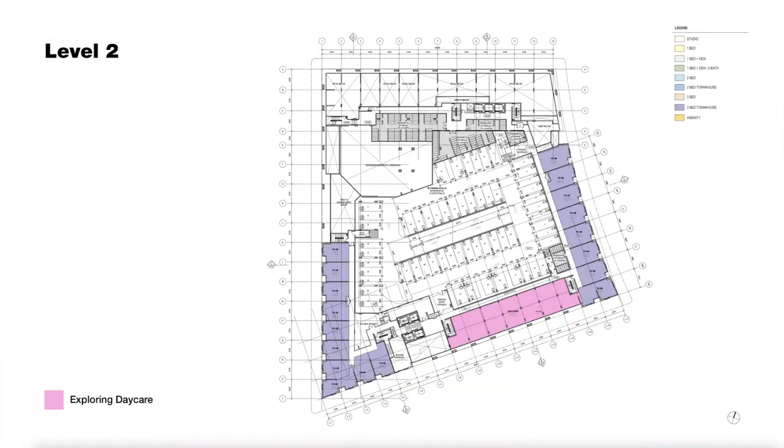As you emerge up, you get your second level of your double height daycare. You get your townhouses in 2 levels, another level of parking. And then we have a single loaded corridor which wraps around the final level of parking, with people who have incredible access into their units from their parking.

And as you come up, we get the podium, which has the outdoor space, now private, which accesses directly amenity spaces facing in from the cores into the central courtyard, and some wonderful little 1-bedrooms which ring around the internal courtyard.

As it emerges on level 7, you get the street wall, which turns from Front Street onto Bayview, and the tower starts to emerge, with outdoor spaces at level 7 and amenity in the tower at that level.

As you get higher up, we start to get more units, and at level 13 you get the amenity space near the top of the building on the corner of Front and Bayview, with very large outdoor amenity spaces which also have lots of natural light.

As we merge up, the tower shifts into 2 elements and then eventually separates into one smaller, very tiny tower for the final floors. I'm now going to pass over the shadow studies to Bousfields, and I'll let them talk about all the efforts we've gone to minimize the shadowing on the park.

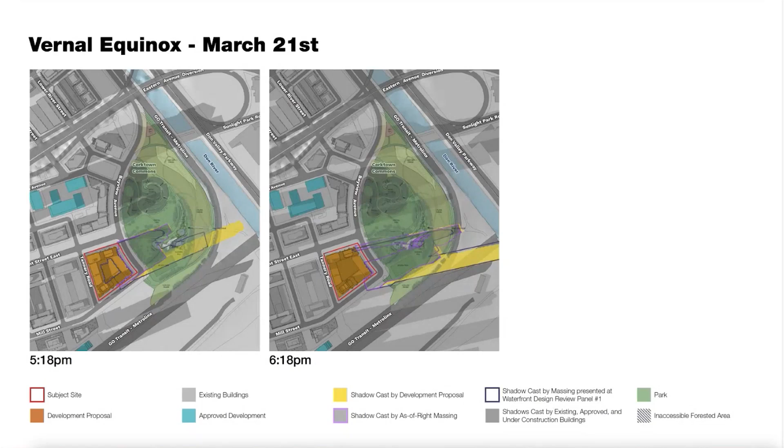And then by 6:18, the shadow is largely off the park, with only a sliver of incremental shadow on the park itself. If we go on to the next slide and look at June 21st, we can see, again, the same color scheme showing the same separation of different shadow types.

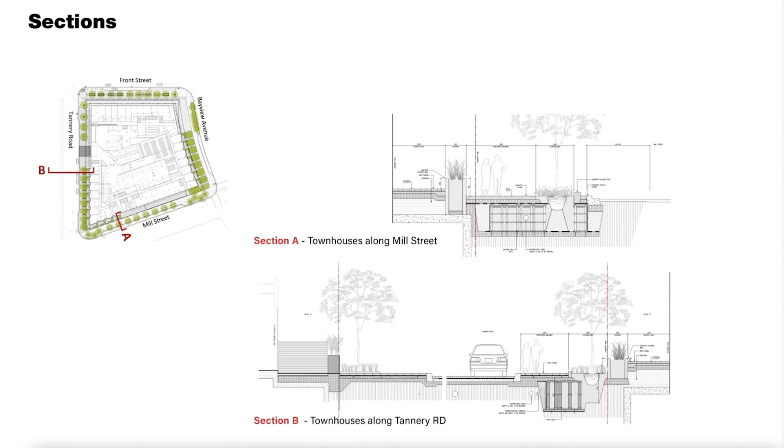Similar to what I said, in section B we're replicating the frontage from Block 12 onto our side, Block 13. Next, for sections through Front Street and Bayview, again Front Street has many existing trees.

We'll continue preserving that streetscape, and sections through Bayview will replicate a similar section and form where the private terraces are buffered by a planter, with additional plantings separating them from the sidewalk system along Bayview Avenue. That's essentially our landscape segment.

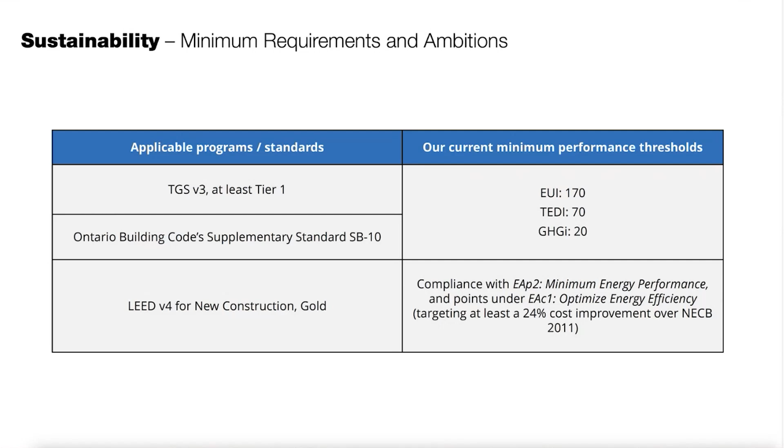So some of the overall big picture sustainability, energy, and climate strategies that we're targeting: high performance building enclosure, in-suite energy recovery ventilators for the suites, highly efficient water cooled chillers, and high efficient water source heat pumps system with backup condensing boilers.

Looking at induced draft cooling tower with variable speed drive fan coil. Overall, the building is currently at a 50-50 window to wall ratio. We have 95% efficient condensing boilers for space heating and service water heating, and electronically commutated motors for the ERV fans.

VFD drives in most hydronic pumps, and high efficiency LED lighting fixtures with occupancy controls. On the sustainability side, we're targeting LEED Gold, currently at 63 points, with a number of items required to hit those targets.

In terms of LEED credit strategies, we're looking at bicycle parking, electric vehicles, storage and collection of recycling, light colored paving, and vegetated roofs to reduce the heat island effect. We're also looking at careful selection of exterior lighting to reduce light pollution, and all lighting will be LED.

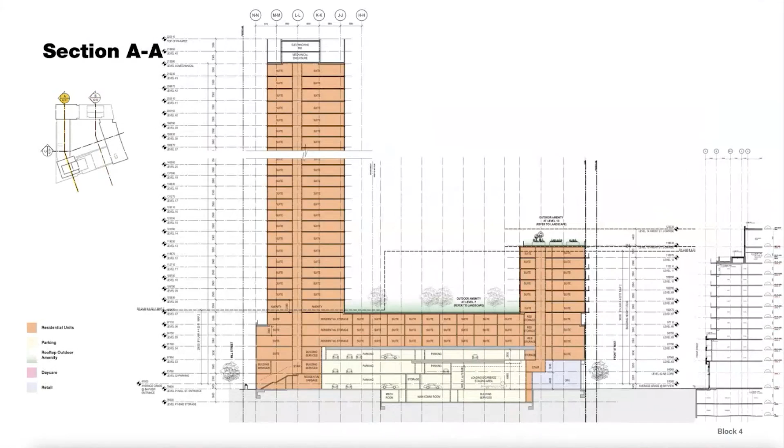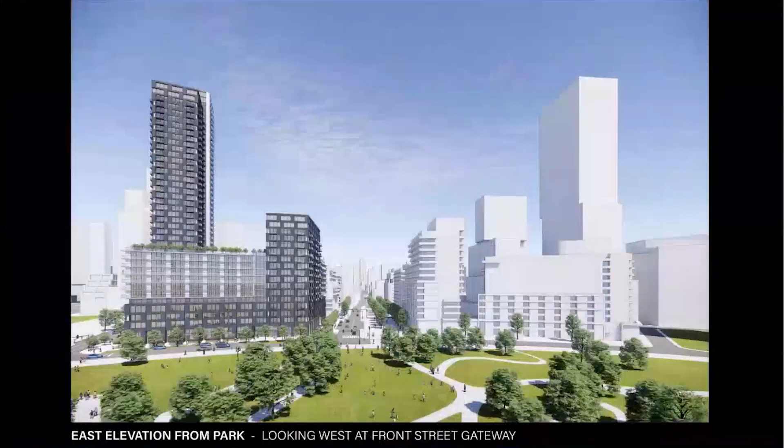Thanks. You mentioned you were going to do an LCA and look at embodied carbon. What's the target intensity you're looking at? I think that still needs to be determined with our sustainability consultants, but we want to try to reduce it as much as possible. There are a number of strategies presented last time, like concrete with low embodied carbon, with things like CarbonCure and such. We want to look at all strategies to minimize as much as possible.

You mentioned that for your systems you're using a water source heat pump. Is that a ground source system? I think at this point we're still exploring what the options are. I don't believe it's currently a ground source heat pump, but that's something we need to develop further at the next stage. It's very early days - it's been a long time, but we're just getting started again.

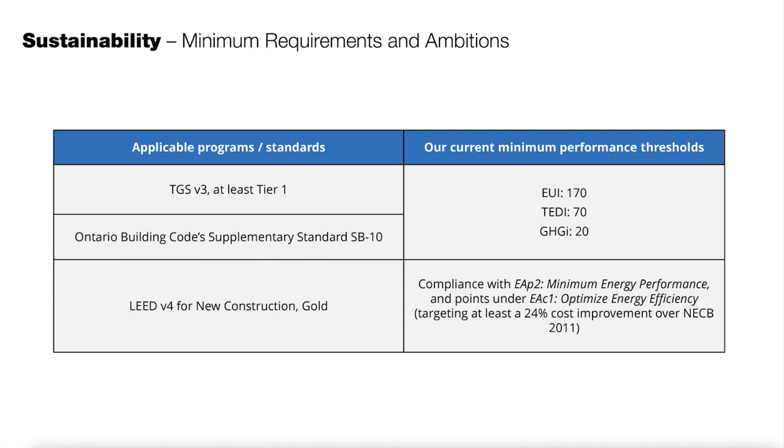Well, I'm just trying to understand the project a little bit. Can you go back, or maybe one more slide after this? You say high efficiency water source heat pump - what's the heat source? The heat source is the plant.

Okay, go for it, Aileen. She's here - sorry, we had trouble attending the meeting earlier, we weren't let in. Sorry for being late, but I can answer any question about the energy strategies. Currently, yes, we are aiming for water source heat pumps, but it will be condensing boilers with high seasonal efficiency as of now. We'll also be considering and doing feasibility studies for geothermal. That's good to hear - so you're firing a water loop with condensing boilers, and you'll have decentralized heat pumps off that loop? Correct.

Okay, let's go online. Pina, are you there? Yep, I'm here. All right, thank you. Any questions? Yeah, I have a question - it's maybe an extension of some of my colleagues' questions.

Based on all of the images of the new iteration of what you call the tectonic strategy, the articulation of the architecture - there's no distinction programmatically, no inflection or reverberation when program changes. It looks from the renderings that whether it's retail, townhouse, residential lobby, or daycare, the architecture is articulated the same as it hits the ground. Is that to give flexibility for that changing program, or maybe the contentious private residential on the park?

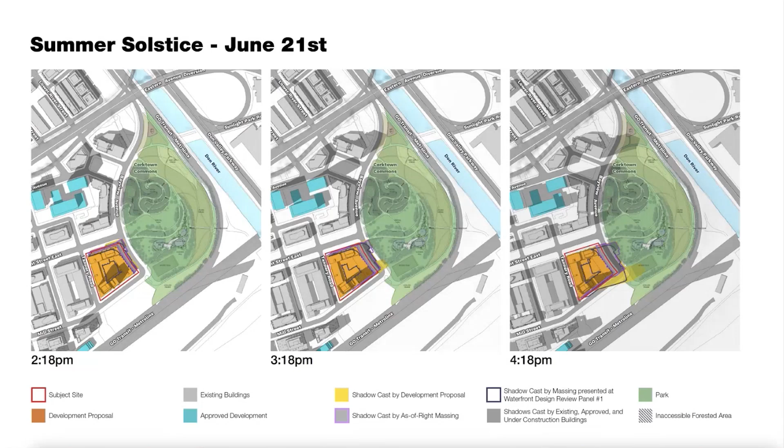Here you can see really well what's happening in summer. It's going to get sun in the morning, which is really good into the inner courtyard, and then it's going to free up in the afternoon as well. So it's well placed compared to where it was before. It's going to get afternoon sun here, and we didn't do the morning here for you, but we can.

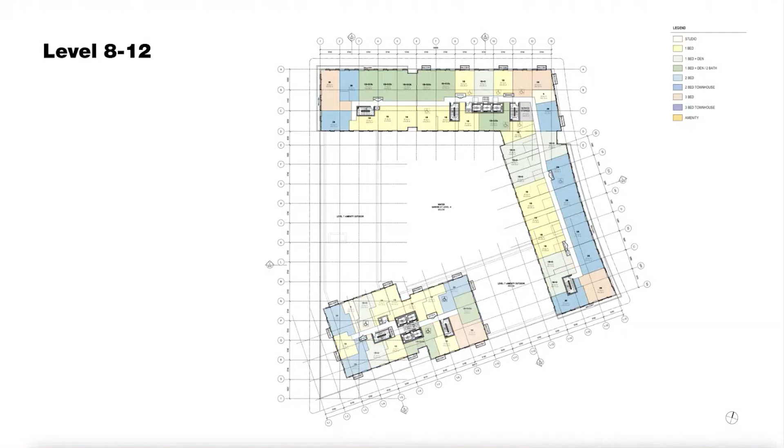We used to have an 8-story cross section all the way around. Now we have 3 stories here instead of what was 2. This used to be lower down at the bottom, and this part was higher. So we've lowered this down to 6 stories, and raised it up 3 stories here. In terms of light, it's infinitely better than what it was.

You can see the stepping in behind. We're very pleased with this - we've done much better, and we'll look at it more closely in the next stage.

Just one last question to follow up on that - I guess this is for NAK. Is the landscape shown in the aspirational photographs achievable given what you understand of how much sunlight that courtyard will get, or does that remain aspirational? In the next set of design development drawings, we'll see what's actually achievable.

I think it's very close to what is achievable. We do have a lot more sun than before. So the images, yes, they're aspirational, but we're confident we'll be able to achieve most of that. We'd love to have all this planting in the middle - we would love that.

Betsy, I heard you don't have any questions? No, Paul, I'm good, thank you. Okay, Emily, are you there? Yeah, I'm here, any questions? No, my questions have been answered. Okay, great, let's go to comments.

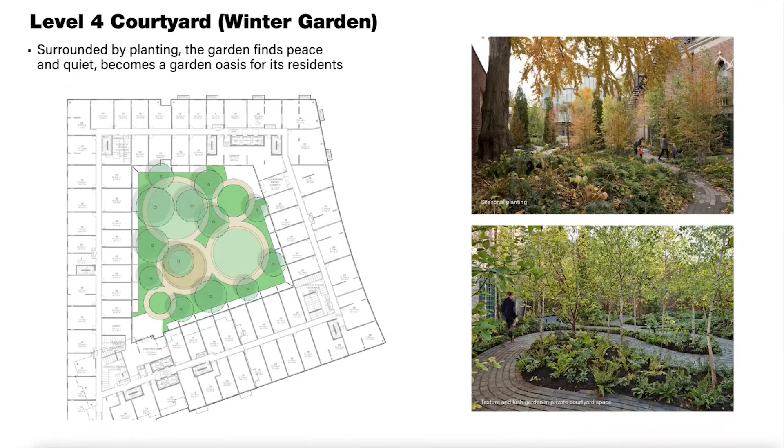Sure. So first of all, I'm really happy that there's a proposal for this site. It's such a privileged location, and it's kind of like a missing piece. Corktown Common is just a beloved space within both the city and part of the Waterfront.

I think the commitment to public art that happens along Front Street is so good. And I guess I would love to see not just private residential looking onto the park. I think there's a whole arc that could be viable retail of some kind - the potential for using smaller sizes so it doesn't have to be big floor plates.

Really engendering a level of community retail that just doesn't exist right now along Front Street. We've seen so many different projects come along - can we put a grocery store, can we not put a grocery - there's been a whole kind of discussion. I would love to see a much more robust retail sort of life along Front Street.

And then I just feel like when I see residential townhouses fronting on what is a major public park in the city, it just feels like it needs to have a more public presence. For sure it needs to be viable, and that goes without saying.